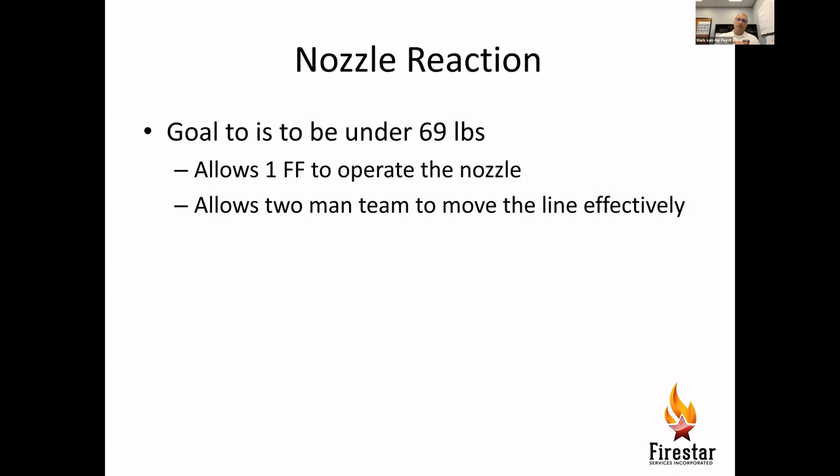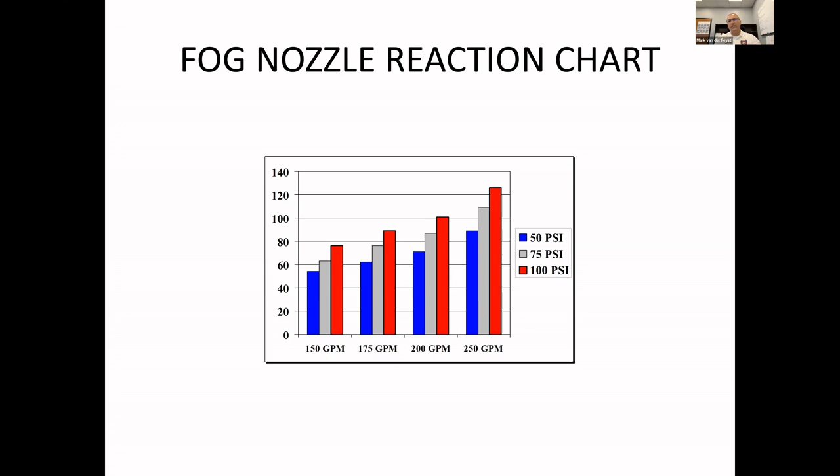So something to consider: when you look at the nozzles you're using, are they working against us or for us? The higher the nozzle pressure and the more water flow I'm producing, the more it's working against me—I need more people to staff that line to make it work properly.

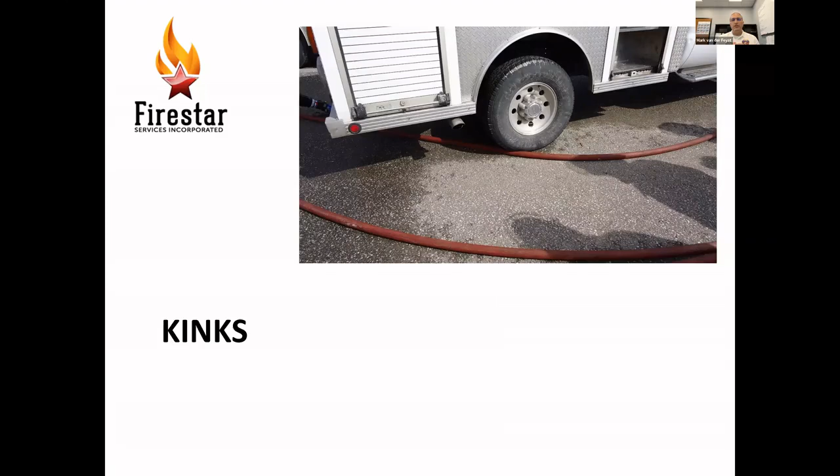The second thing I want to point out is kinks. Kinks are where the hose itself bends. The branch is meant to stay straight as much as possible so water can flow through that laminar opening with ease. But when I have a bend in the hose somewhere, like in the picture, the hose is caught under the tire a little bit. That's a kink, and kinks are not good.

Why is the number 150 being used? It's because that's what's recommended by NFPA for interior residential structure fire attack. I have to have 150 GPM flowing minimum from my hand line, let alone having two for a combined fire flow of 300 GPM. That's for a residential building.

If I'm going into a commercial building or an industrial building or like a shopping mall, I have to have a lot more, much more than 150. It's going to be in the 250 GPM range that's recommended to combat that fire load and fuel load within those buildings.

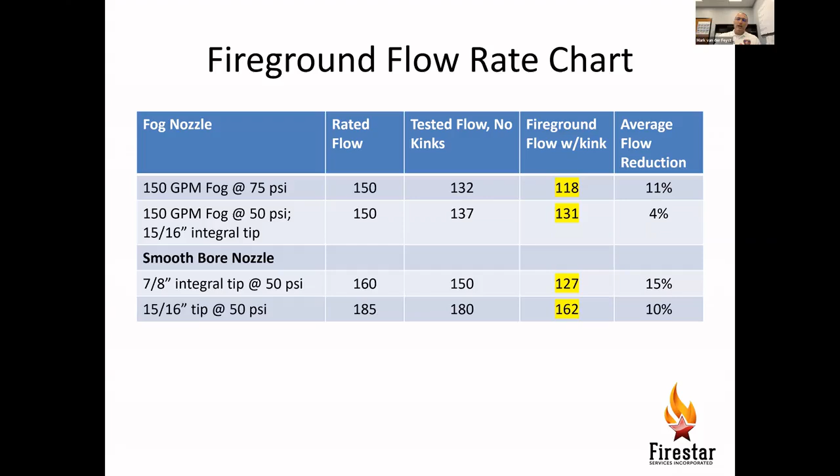The rest of the numbers you see below are just showing different examples of different types of nozzles and hose lines based on nozzle pressure and flow rates, but you're seeing there's a reduction. There's always going to be a reduction of water flow. And we do not want that, because kinks kill.

A kink in the hand line kills firefighters. How? Because I'm losing my water. What's my defense against the fire? It's putting water on it.

I want to dump, like I said, those 55-gallon drums of water on that fire every minute. But when I have a kink in my hand line, I'm not able to dump 55 gallons of water. I'm only able to dump this little cup of water, and that's it. And that little cup of water is not enough to put the fire out.

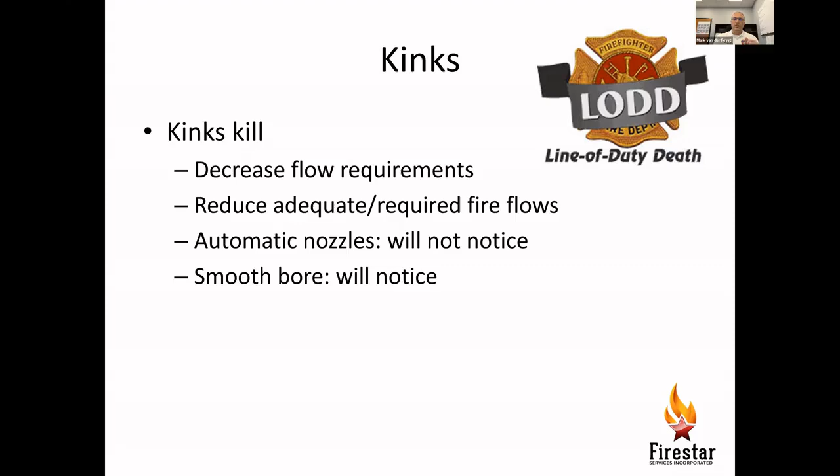Hence, the fire overtakes us and either destroys the building and we get trapped, which means we die in the process, or we get severely injured. And that's why I'm saying kinks do kill as far as the fire service is concerned. So when you're looking at fire flows and delivering water, you want to make sure you never have kinks in the hand line.

One thing important for us to understand is that even though we have branches, nozzles, hoses, trucks with water, water sources, a nozzle does not produce water. A nozzle only delivers water. What produces water are the sources of water: lakes, rivers, pools, hydrants.

That's what produces water. We have to get access to that. And if we get access to it, we can deliver that water to the nozzle needed to dump water on that particular fire. So we can't expect the nozzle to produce what's needed; we have to make sure we have it, secure it, and deliver it.

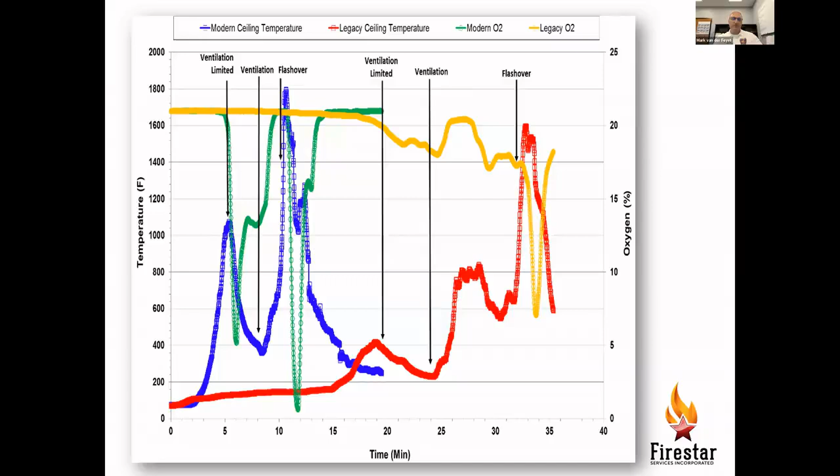Okay, so I mentioned the word flashover, and we looked at last week some terms, measurement like kilowatts, megawatts. The number to remember for what trigger point does flashover occur at the ceiling - that's at the ceiling, not at the floor - is 1112 degrees Fahrenheit. That's the trigger point.

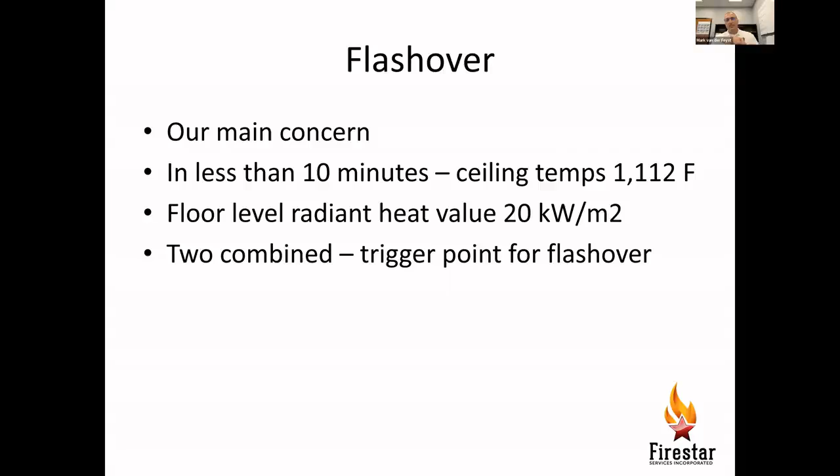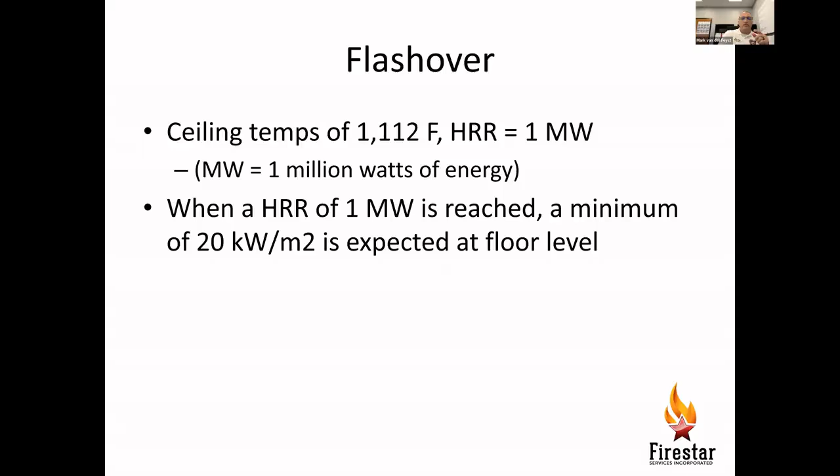Once that ceiling has hit that temperature area and the floor has that radiant heat transferring to it, it shows you that 20 kilowatts per meter squared. Once those two are present and they combine, that's when flashover occurs. What do I need to produce a flashover? As it says here, I just need 1 megawatt to produce that environment of energy production.

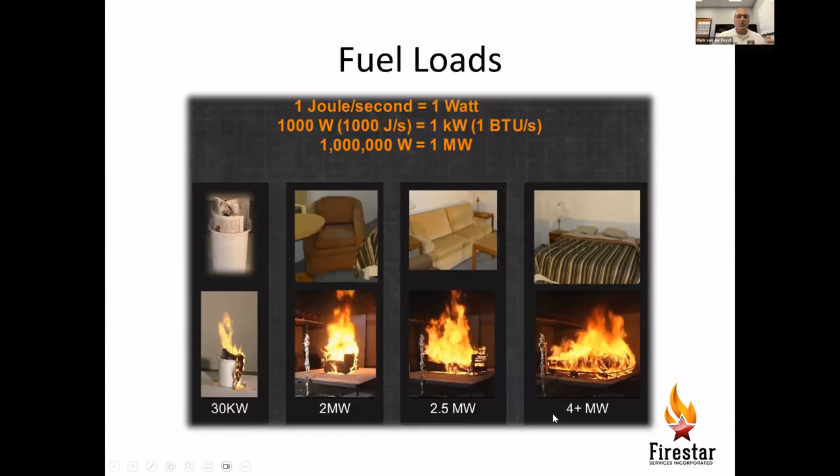Well, what does that look like? Here's some examples - I mentioned this last week, just a quick review. Some examples of what we see here for different energy production: waste paper basket, your sofa chair, your love seat, your bed, and they're all producing different megawatts of energy production. But it only takes one sofa chair in one empty room, which is 2 megawatts of energy production, to produce that flashover within that residential space.

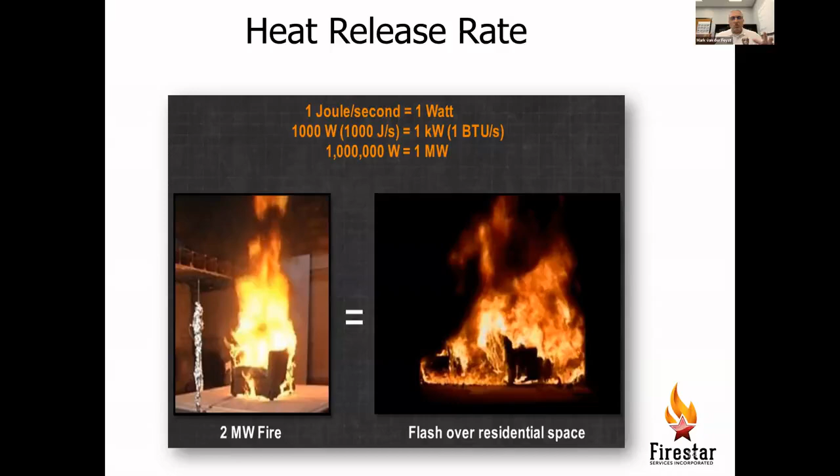So not a whole lot's needed. And a lot of rooms, a lot of homes, a lot of buildings have more than just that stuffed and crammed in there. A lot of fuel load, a lot of energy production is being produced from what's inside there.

So now we know what we're facing. Let's look at how my water streams, the type of stream, and the amount of water - what does that do for me? Because it can do one of two things: it can either help me or it can make things worse.

So this smart guy in New Zealand, Cliff, he's a fire protection engineer, did some research, and he found that when you have a ceiling temperature of 1112 degrees Fahrenheit, a fog, which is a wide pattern of water, absorbs heat at 75% efficiency. So when we look at that statement, we think, wow, that's good - that's absorbing a lot of heat compared to the term smoothbore, or a straight stream, which only absorbs 50% of the heat. So looking at 75 or 50, you would think, hey, I got a bigger number.

So therefore, that water stream, that fog pattern, is absorbing more heat - it's doing me a good thing. But we got to stop and think for a second. What actually is happening when I introduce a fog pattern into a superheated area at 1,000 to 2,000 degrees Fahrenheit? Is it really absorbing heat? And the answer is no. It's actually doing us harm. It's absorbing heat, but it's absorbing heat and turning it into steam. And that's where the harm comes in.

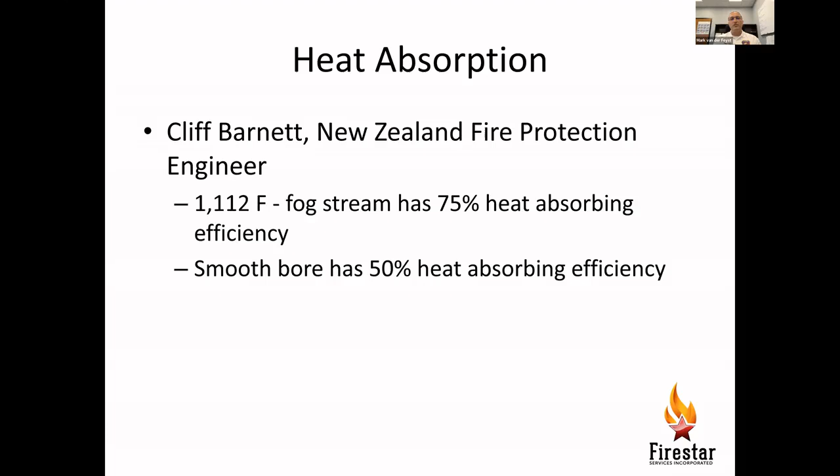When looking at my water stream, so you look at your nozzle, the water that comes out is traveling. I want that stream reach to do some good for me. And a fog pattern with little water droplets doesn't have the reach that a straight stream will give me. A straight stream, I might get 20 feet, which might be like 6 meters of reach. Whereas a fog pattern, I'm only going to get maybe 3, 4, or 5 feet, maybe one to 1.5 meters of actual reach. That's not very far.

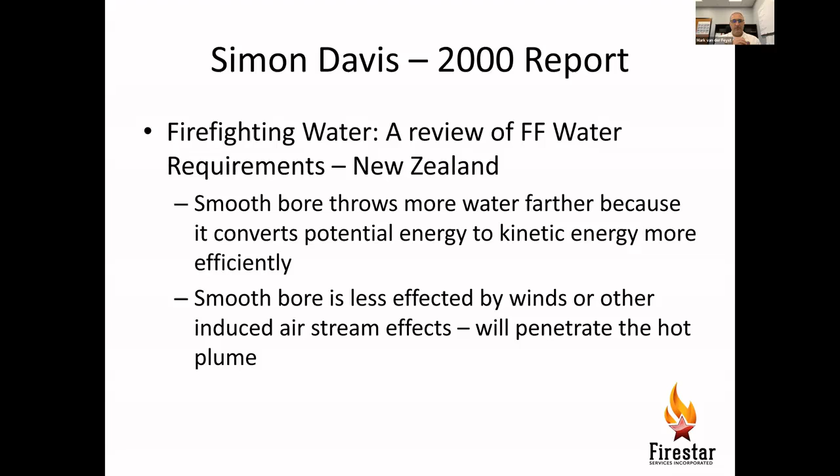And then you factor in if it's a windy day, if it's a lot of wind that's being produced, that wind carries my little water droplets away. Whereas if I have a straight stream, which has bigger, fatter water droplets, they're more prone to actually make it to the fire and not be carried away by the wind.

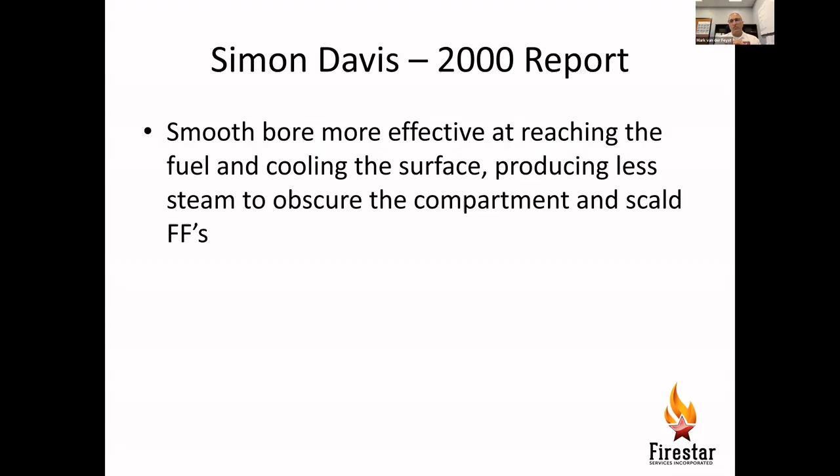Okay, so in terms of water flow, fire flows, what type of stream pattern should I have? I want straight. So that way I'm guaranteeing it's actually going to reach its target. It's going to produce less steam. And that way I'm not, as a firefighter, going to hurt myself in the process with that steam conversion factor.

All right, so I mentioned water droplets. And this is kind of the culmination of the crux of our topic here today. Fire flows, water delivery - what kind of water do I want to have being dumped on my fire? I use the analogy of a 55-gallon drum, but in reality, I can't carry a 55-gallon drum and dump it. So I got to use my nozzle. So a nozzle is delivering water. When the water leaves the nozzle, and I've seen what kind of nozzles you guys use.

So you have a combination, which gives you the opportunity to go to a fog pattern or a straight stream. On that straight stream, there is still water droplets individually being pushed together and being sent out in that straight stream fashion. So we gotta look at how big are my water droplets? And the bigger my water droplet, the better it is.

So let's use an analogy of water droplet sizes. If I look at a small little mustard seed, as small as it is, that's what I'm delivering from a fog pattern - mustard seed size water droplets. But if I look at a big fat green or juicy red grape that's growing on a vine, those big fat grapes are what I want to have coming from a straight stream or a smoothbore type nozzle. So the fatter the water droplet, the better. The smaller the water droplet, not so good. And we're going to see some numbers here.

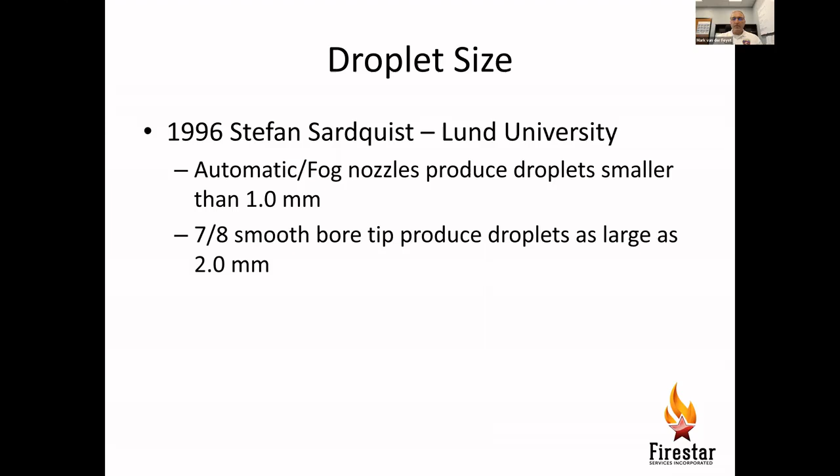So again, through science, this is a little old from 1996, but it's still relevant because we still have the same fire behavior that's taking place back then that we see today as far as our modern fuel loads and the kind of nozzles we're using.

Mustard seed size, which is like 0.35 millimeters in diameter from a fog nozzle - the result was when introduced into that 1,000 to 2,000 degree environment, 75% of that water evaporated at the ceiling and became steam. Only 12.5% fell to the floor, and 12.5% got caught in the thermal, which means it just went into the thermal heat and didn't do anything, just kind of hung out there and did nothing. So nothing was really accomplished at all using that little mustard seed style or size of water droplet.

Why do I want water to fall to the floor? I want water to rain down on the floor to cool the surface I'm working on. It also tells me if I have water going up to the ceiling to cool off the ceiling and walls. When the water rains down, it means I'm cooling the upper temperature because that water isn't becoming steam, it's staying water and raining down on the floor, helping cool off the floor as well. So it's doing two things for me.

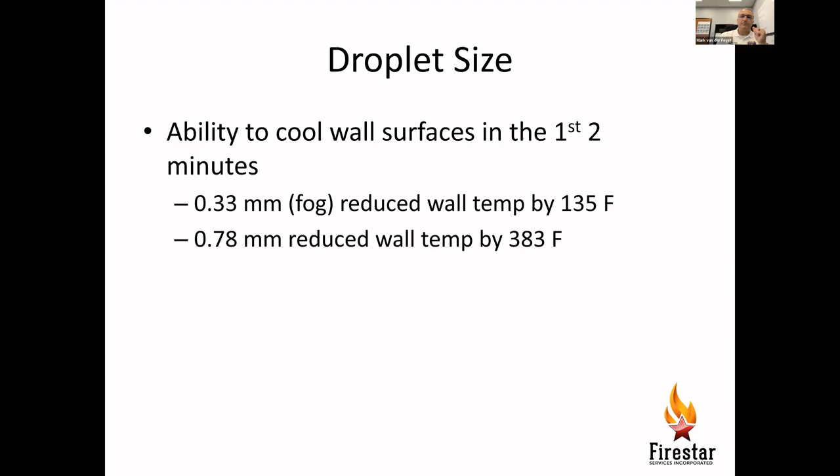Just looking at the first one and the last one, which one would you want to have leaving your nozzle to fight the fire you're facing? I know for me, my hand goes up and I'm saying I want number 3. Give me the fat green grape. Give me that 2 millimeter water droplet size, because with that larger size of water, I am doing a lot of work in dropping that temperature from 2000 and bringing it right down to almost nothing. That's what I want to have happen. And that's hopefully what your goal should be too, because by doing that, you're going to make the environment easier to work in. You're going to make it safer for the occupant, and it's going to allow you to knock that fire down or suppress that fire very, very quickly as compared to using a fog pattern or delivering not as much water and the fire getting the upper hand and overtaking you.

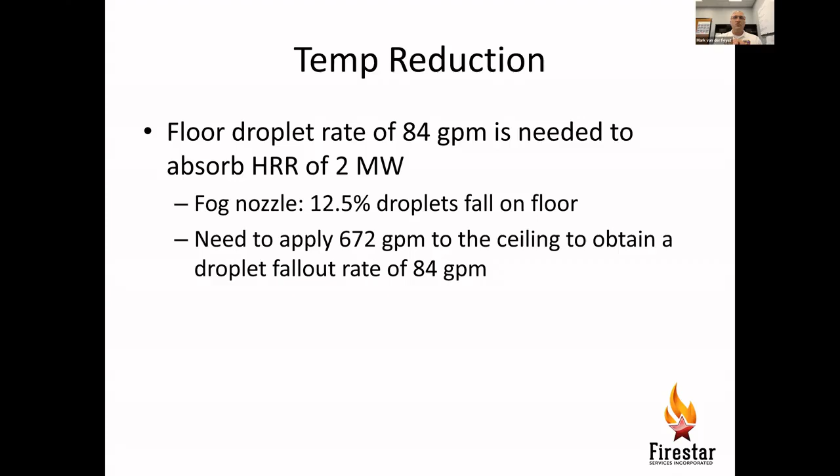So I've come to the end of our little lesson here, and I hope that looking at fire flows and water delivery, even though there's a lot of numbers being thrown at you today, I don't want you to be too confused by this number and that number. I want you to focus on the most important thing.

This is the key takeaway right here. Your water that you're delivering has to be sufficient in volume, right pressure, and distance and reach and pattern, which is a straight stream, always a straight stream for anything interior. Because if I do, then I'm going to be meeting the 5 ways that water helps me achieve extinguishment, which is the unaffected fuel, fuel surfaces, the flame, the hot smoke or black fire, and the hot surfaces of which I'm working on and within that structure itself.

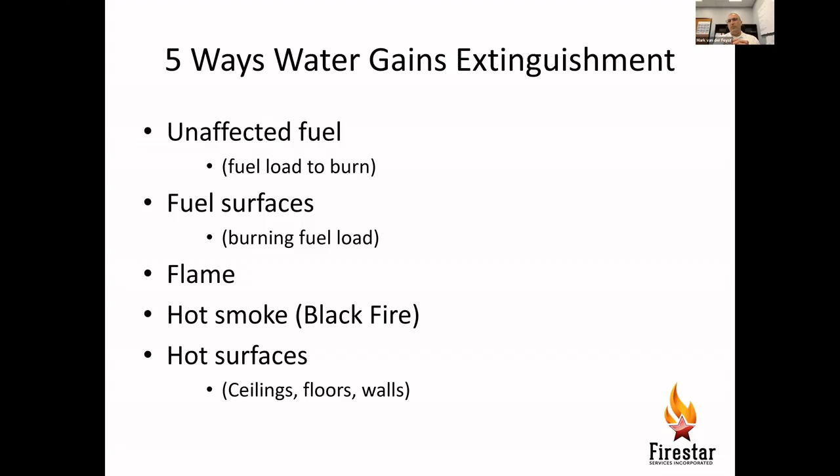So look at these 5 points, and then think to yourself: big, fat, green, juicy grapes. That's what I want delivered. I don't want mustard seed style water that's going to cause more harm and more steam conversion than a big fat green juicy grape.